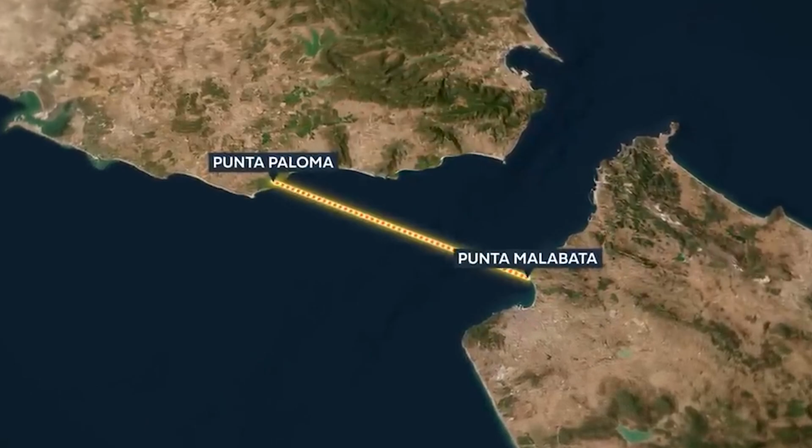Imagine a bridge so daring it could connect two continents, a structure stretching over turbulent seas, deep waters, and even the unpredictable forces of nature. Yet, despite its apparent simplicity in distance, no such bridge exists between Europe and Africa. Today, we'll uncover the reasons behind this engineering enigma.

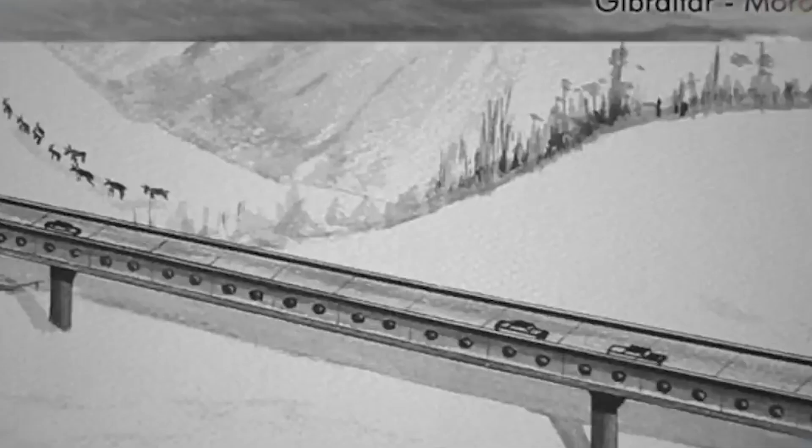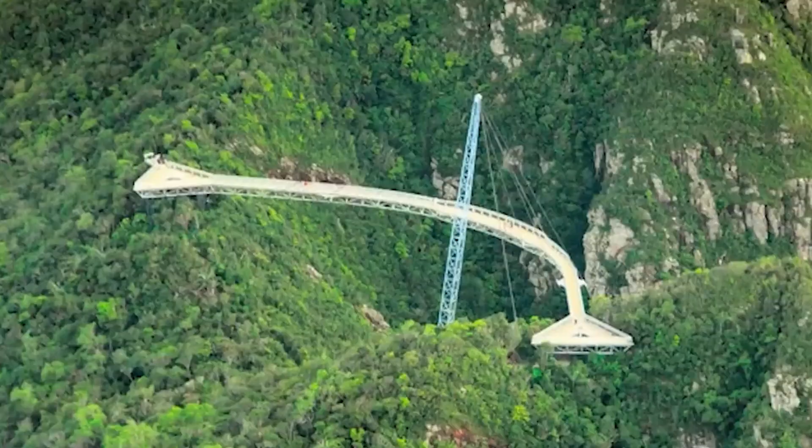The idea of linking Europe and Africa by bridge has fascinated engineers and dreamers for centuries. At first glance, it seems almost feasible. At its narrowest, the Strait of Gibraltar is only about 8.8 miles wide. You might wonder why, with so many long bridges already built around the world, including the Danyang-Kunshan Grand Bridge, which spans over 102 miles, a bridge across this stretch hasn't been constructed.

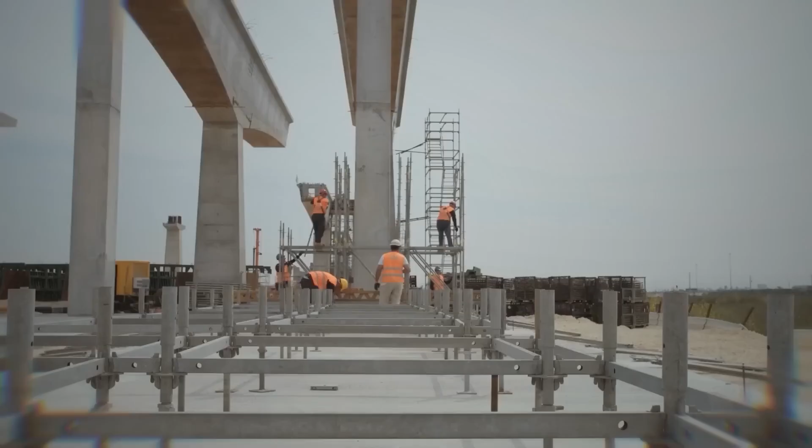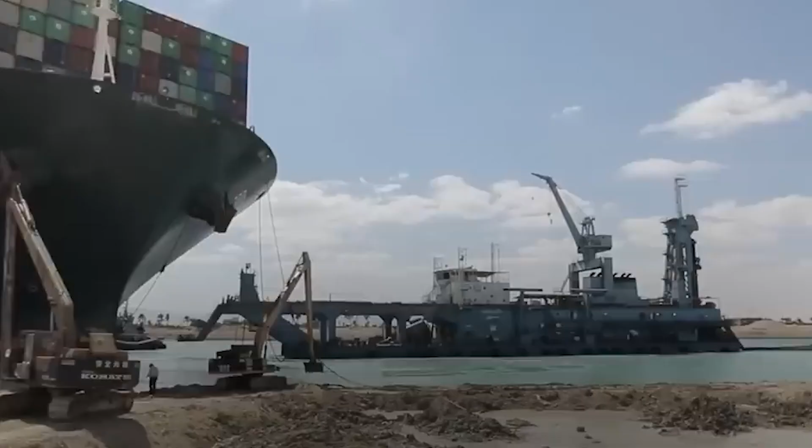The answer lies in a mix of technical, economic, natural, and political challenges that make such a project far more complex than it appears. Shipping lanes and maritime traffic. One of the foremost obstacles is the intense maritime traffic through the Strait of Gibraltar. This narrow passage is one of the busiest shipping lanes in the world, serving as the gateway between the Mediterranean Sea and the Atlantic Ocean.

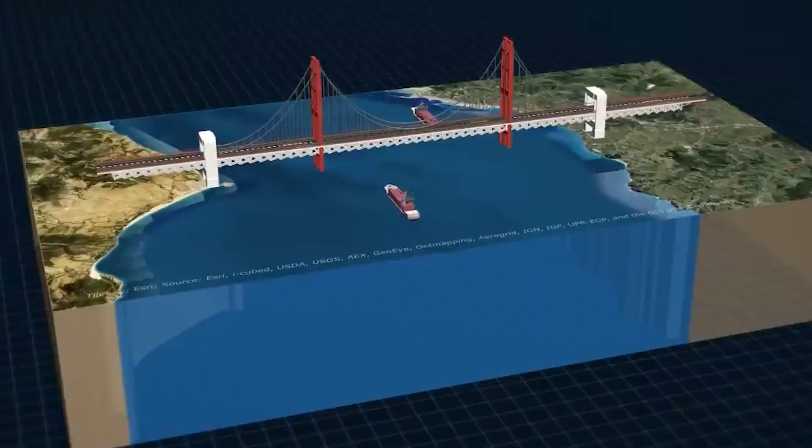Over 100,000 ships pass through this corridor every year, including massive container vessels and oil tankers. A fixed bridge, no matter how well engineered, would have to provide an enormous clearance, over 200 feet, to allow these giant ships to pass underneath without interruption.

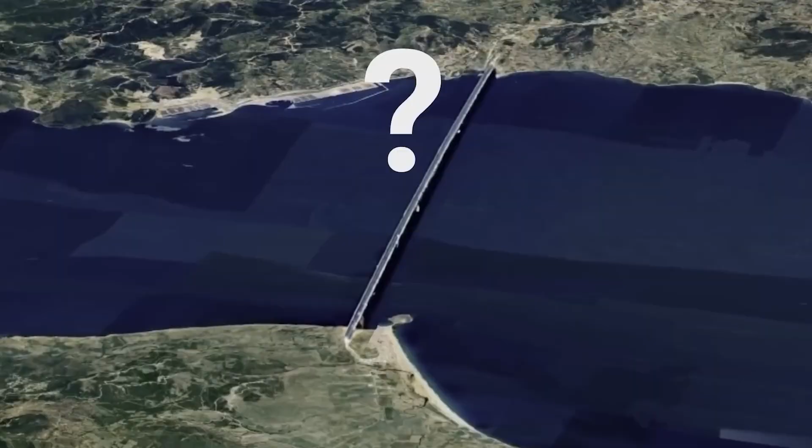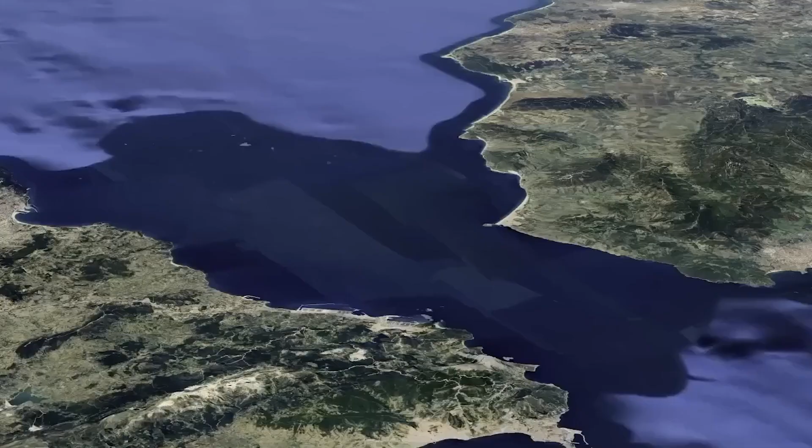Engineering and construction challenges. Building a bridge across the Strait of Gibraltar would be an engineering marvel, but also an extraordinary challenge. Firstly, while the distance might seem manageable at 8.8 miles, the depth of the strait is far more daunting. The average depth is around 1,200 feet, with some parts plunging down to 3,000 feet. In comparison, even the deepest bridge foundations in the world, like those of the Pelješac Bridge in Croatia, only reach depths of around 417 feet.

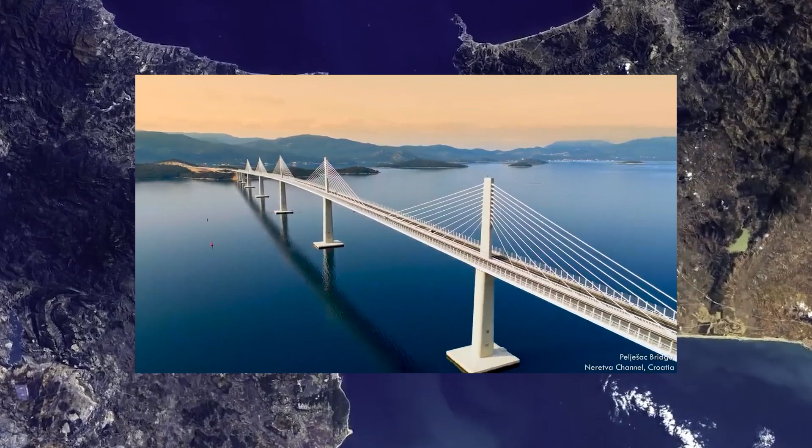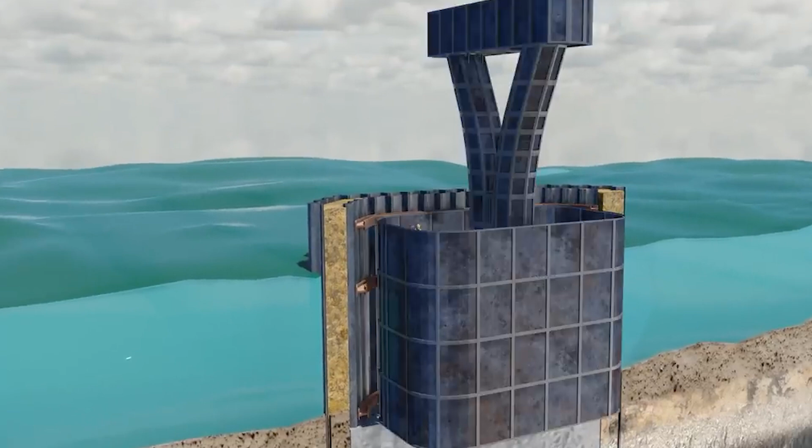To construct a bridge here, engineers would have to build foundations that extend into the abyss, likely requiring supports that are 7 times deeper than any existing structure. This not only presents technical hurdles, but also dramatically increases construction time and cost.

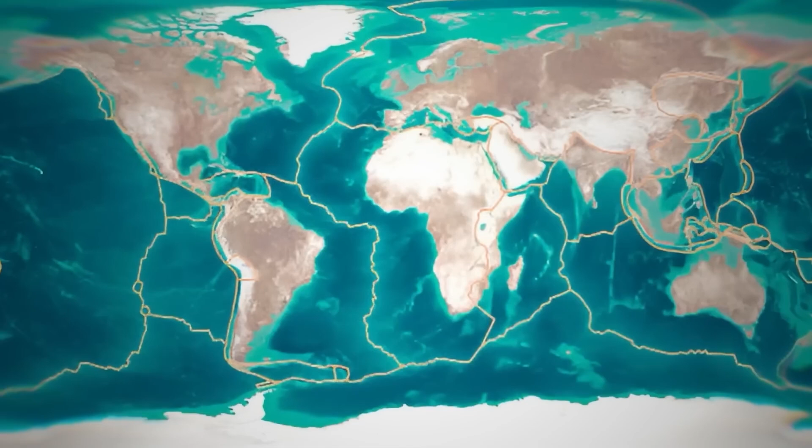Furthermore, ensuring that the bridge remains structurally sound over such depths and distances means dealing with immense water pressure, potential corrosion from salt water, and the constant pounding of waves and tides. Every component of the bridge would need to be designed to withstand these extreme conditions without compromising safety or functionality.

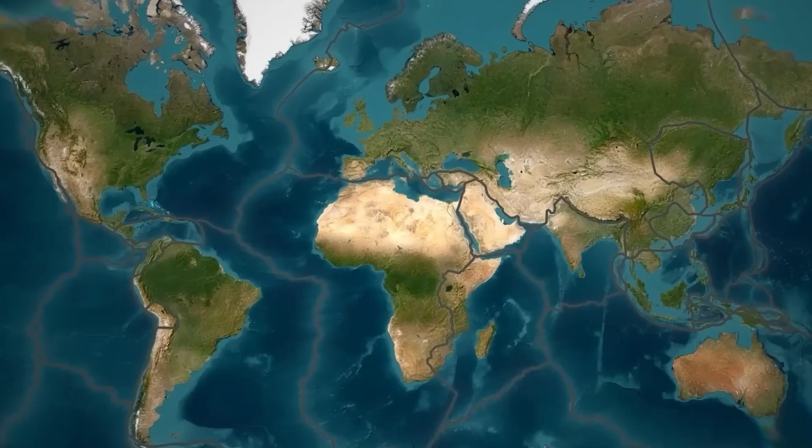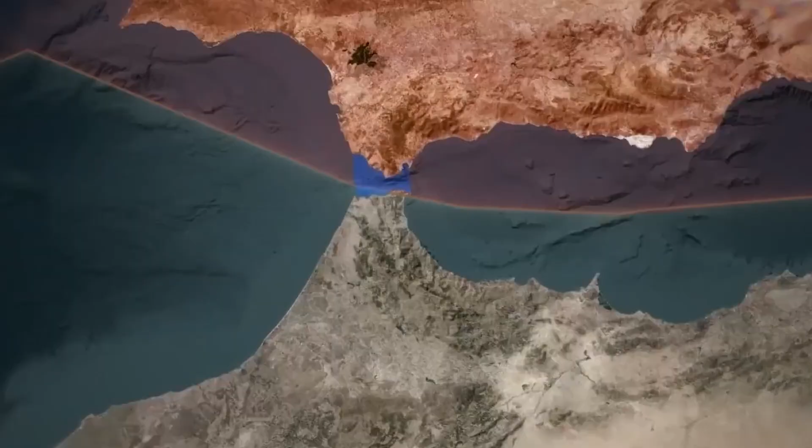Seismic activity and geological instability. Adding to the complexity, the Strait of Gibraltar sits directly above a tectonically active region known as the Azores-Gibraltar Transform Fault. Here, the African and Eurasian tectonic plates, along with the Iberian microplate, slowly grind past each other. This movement builds up stress that occasionally releases in the form of powerful earthquakes.

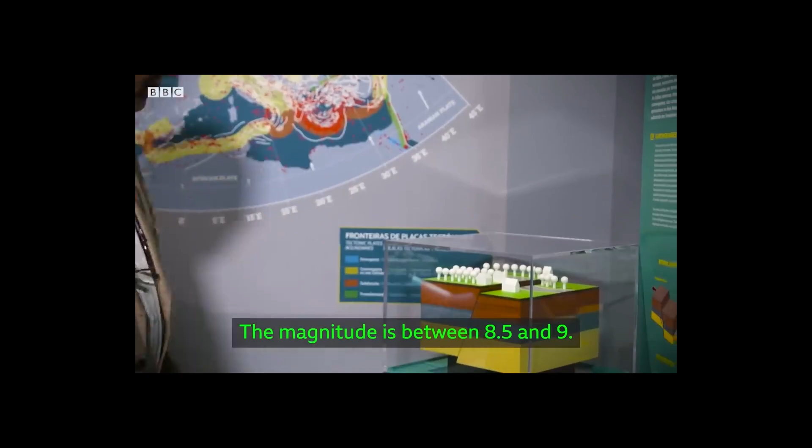History offers grim reminders. The 1755 Lisbon earthquake, one of the most catastrophic in recorded history, measured around 9.0 on the Richter scale and triggered a tsunami with waves as high as 65 feet. A bridge built over such a volatile region would require state-of-the-art earthquake-resistant designs.

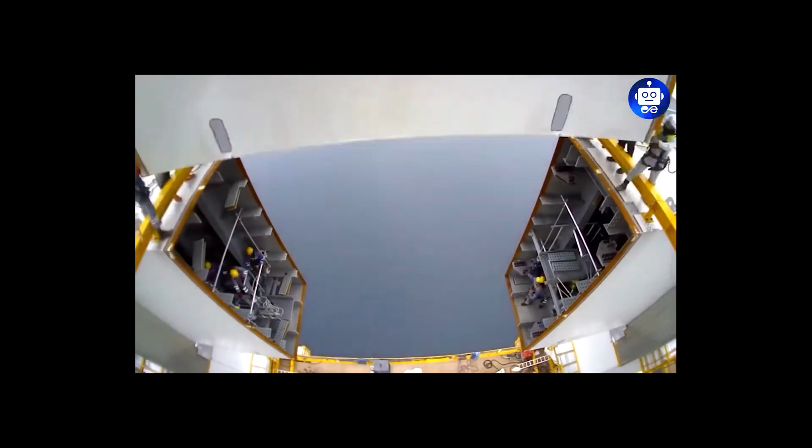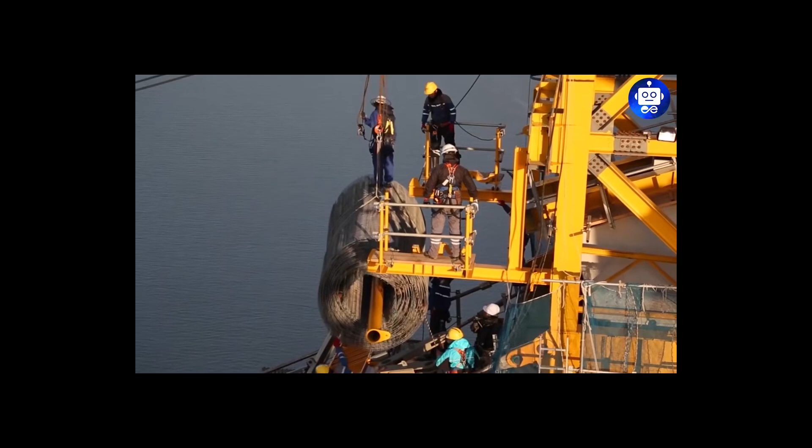While modern engineering has produced structures like the Akashi Kaikyo Bridge in Japan, which are built to flex and sway safely during seismic events, replicating such technology on an 8.8-mile scale, coupled with the need for deep foundations, would be extraordinarily difficult and expensive. The risk of catastrophic failure in an earthquake, not to mention the challenge of repairing damage afterward, further discourages such an ambitious project.

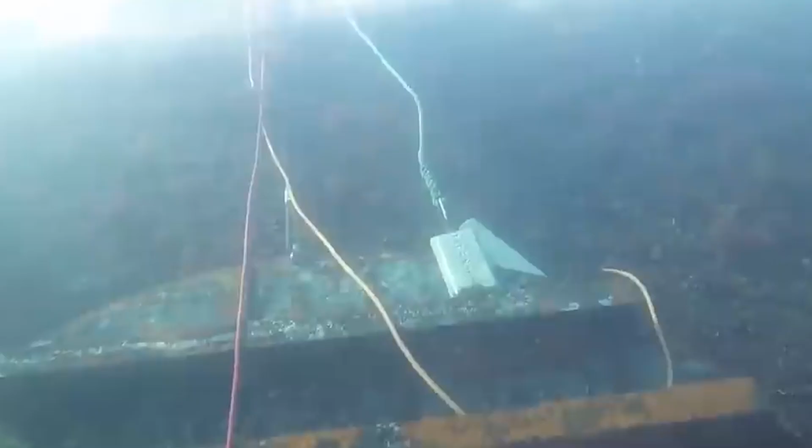Complex underwater conditions. Beneath the surface, the seafloor of the strait presents additional hurdles. The seabed is not a uniform layer of rock. Instead, it contains deep channels filled with unconsolidated clay deposits. These quaternary clay channels are unstable and can shift easily under pressure.

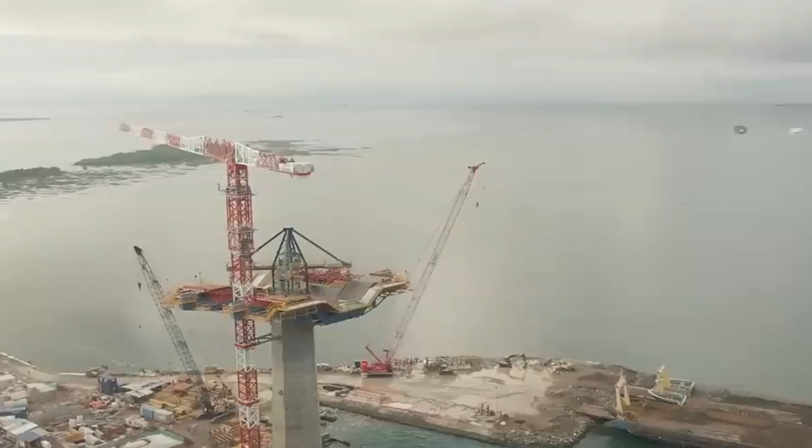If the foundations of a bridge were to be anchored in such an unpredictable environment, there would be a significant risk of subsidence or shifting over time, potentially leading to structural failure. In essence, engineers would have to devise entirely new methods for securing massive structures in an environment where the ground itself is unreliable.

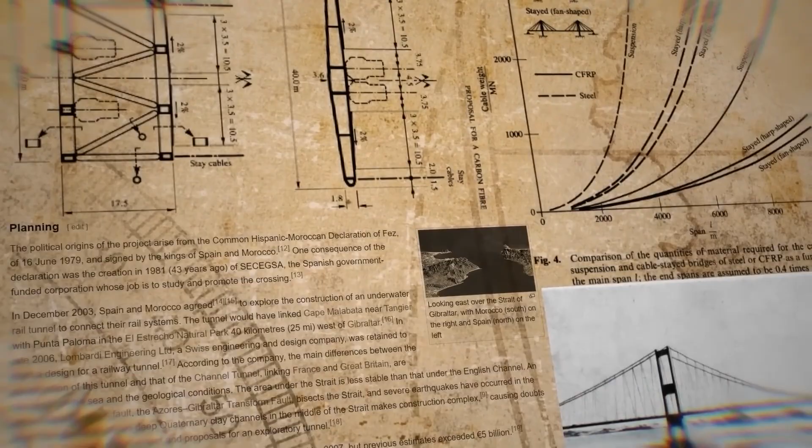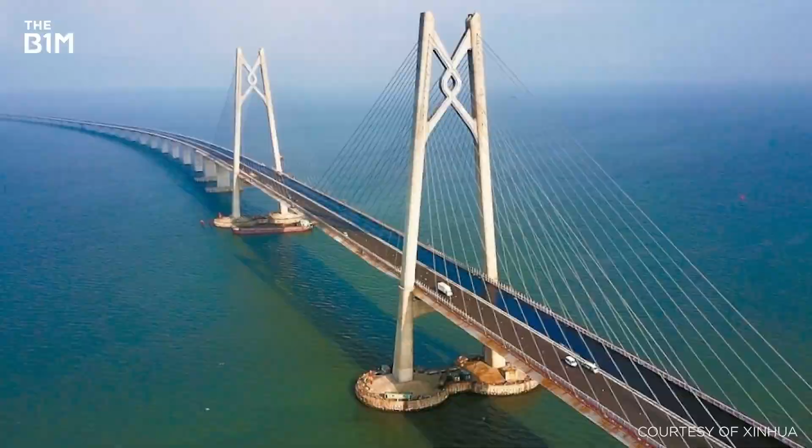Economic considerations. Even if technical challenges could be overcome, the economic cost of building a bridge of this magnitude would be astronomical. Consider the Hong Kong-Zhuhai-Macau Bridge, which cost around $18 billion to complete. A project spanning the Strait of Gibraltar would likely require a similar or even higher investment, given the additional complexities such as deep water construction and earthquake-proofing measures.

With billions of dollars on the line, stakeholders would need absolute certainty that the bridge would not only be safe and functional, but also economically viable in terms of maintenance and operation.

Trade and tourism between Europe and Africa are already thriving, but the existing modes of transport, ferries, airplanes, and even tunnels, are deemed sufficient by many experts. The marginal benefits of a direct bridge might not justify the enormous upfront and ongoing costs. Until there is a significant economic incentive that outweighs the risks, the project remains a tough sell.

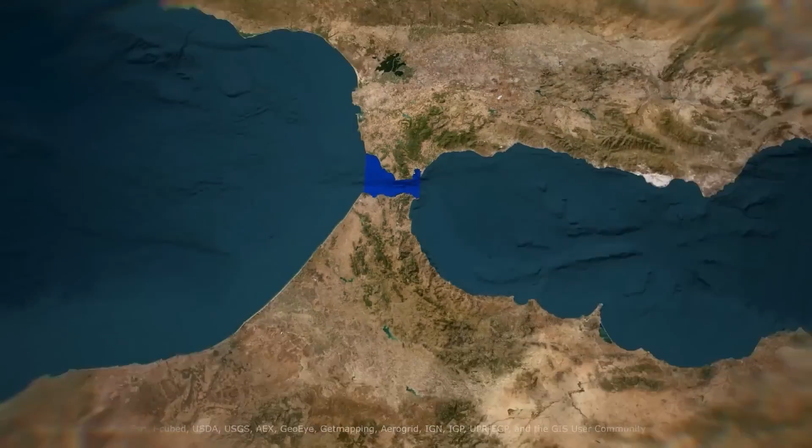Political and territorial disputes. Beyond the physical and financial challenges, political factors also play a critical role. The potential bridge would span from Spain to Morocco, two nations that have a complex historical and political relationship. These disputes have deep historical roots and continue to cause friction between Spain and Morocco.

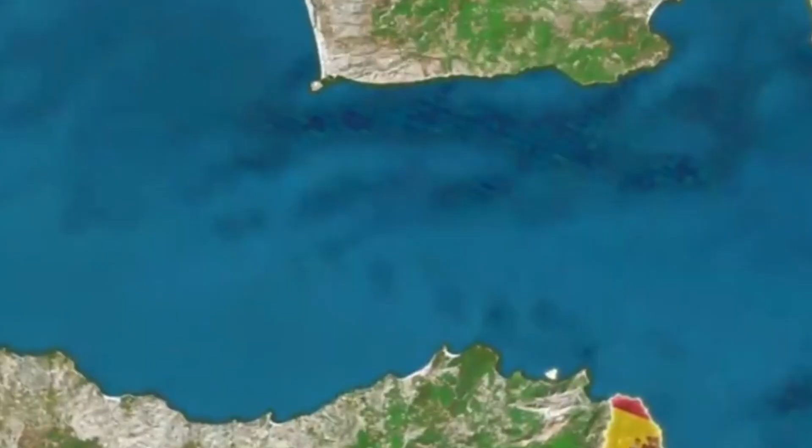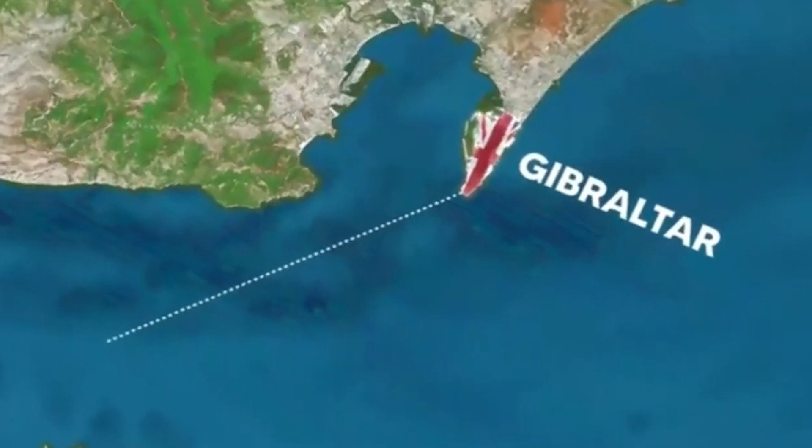Cooperation on a bridge project would require both nations to set aside long-standing grievances, which, given current political climates, is easier said than done. Moreover, the presence of the British overseas territory of Gibraltar further complicates the situation. Gibraltar's status has been a contentious issue between the United Kingdom and Spain for centuries. Any large-scale infrastructure project in the area would require multilateral agreements involving not only Spain and Morocco, but also Britain. Aligning the interests and policies of all these parties presents yet another layer of complexity.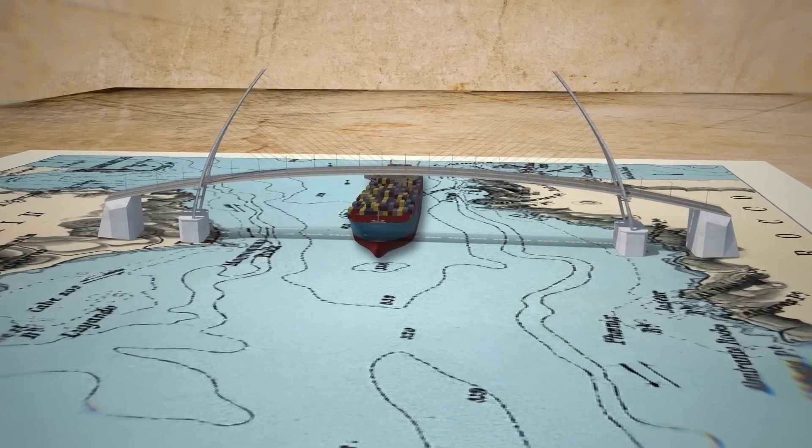Alternative proposals and their limitations. Over the years, several visionary proposals have emerged to solve the Europe-Africa crossing dilemma. One idea involved a drawbridge that could lift its roadway every few minutes to allow passing ships. While creative, this solution would cause frequent disruptions for road traffic, leading to massive congestion and long delays for vehicles. Imagine a bridge that is almost always in motion, opening and closing continuously throughout the day.

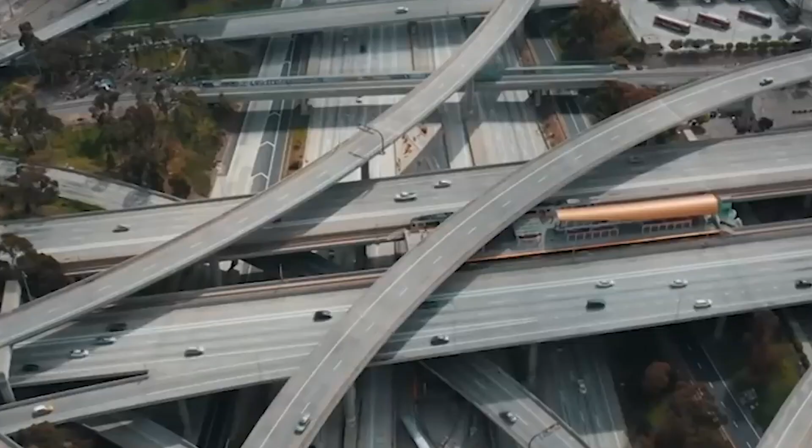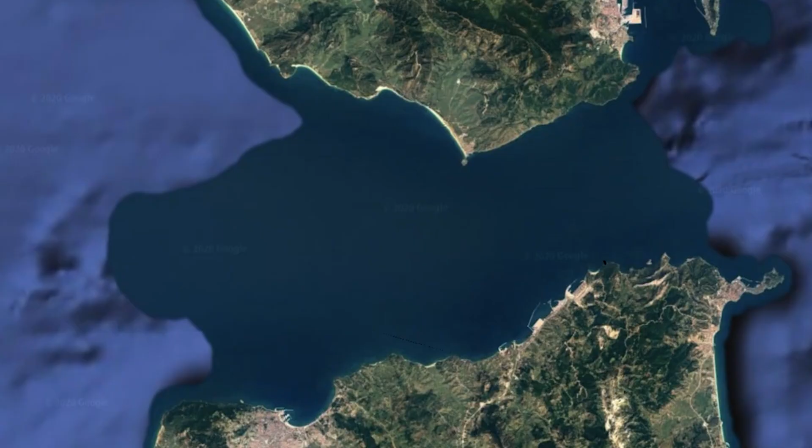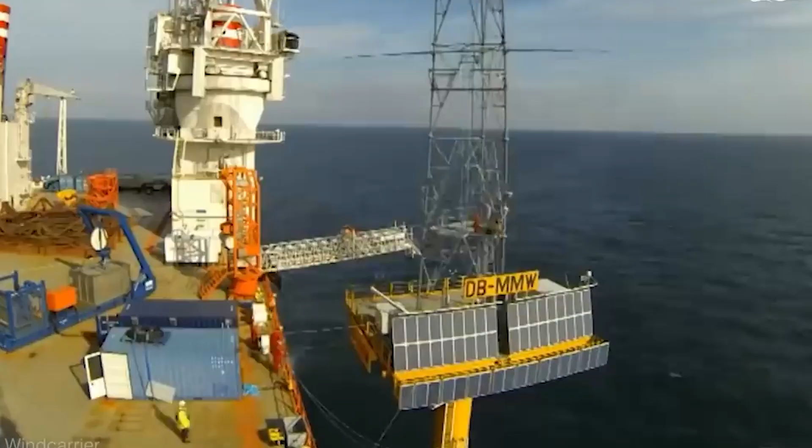Another innovative proposal came from American architect Eugene Tsui in 2004. His design featured a 9-mile crossing that combined a bridge with an underwater tunnel, along with a 3-mile-wide floating island equipped with wind and underwater turbines. Tsui's idea was both futuristic and multifaceted, promising not only a transit route, but also a renewable energy source and tourist destination. The role of natural obstacles.

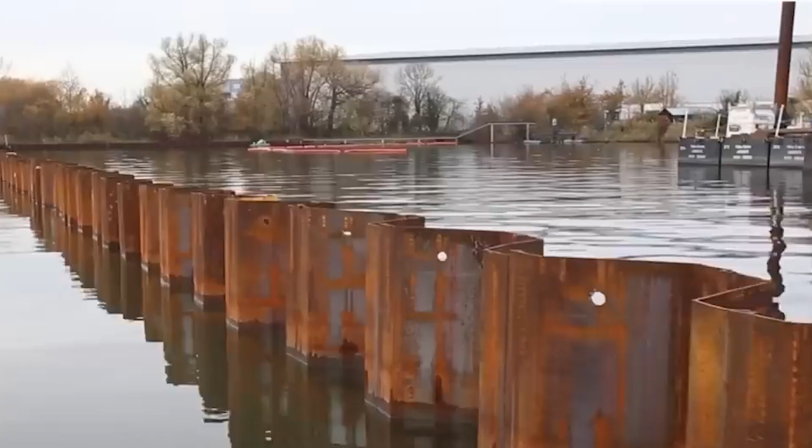Beyond human-made challenges, nature itself throws in unpredictable variables. The waters of the Strait of Gibraltar are home to a variety of marine life, including orca whales. While these creatures are generally not a threat to humans, there have been documented incidents of orcas ramming into boats, causing significant damage. Between 2020 and recent years, nearly 700 such incidents have been recorded.

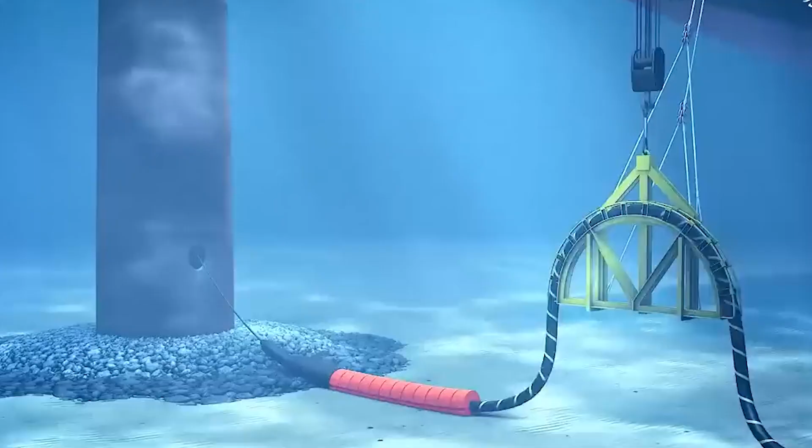These unpredictable interactions with marine life add another layer of risk for any construction projects or maintenance crews working in the area. The threat posed by these powerful animals, combined with the already hazardous sea conditions, makes the work environment even more challenging. Some historical accounts even hint at legends of sea monsters or colossal creatures lurking beneath the waves.

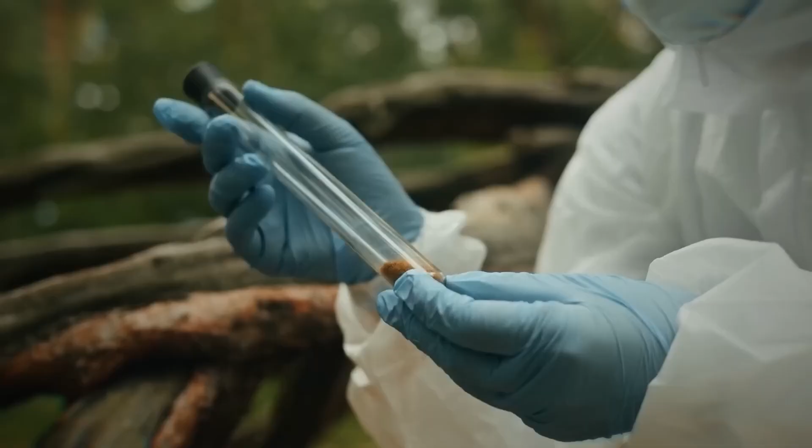While these tales are more myth than fact, they serve as a reminder of the untamed and unpredictable nature of the strait. Whether it's the potential for aggressive marine mammals or the chance of encountering unexpected natural phenomena, nature itself seems to conspire against any effort to create a permanent, fixed crossing between these two continents.

A future possibility. Despite the myriad challenges, ranging from deep and turbulent waters to seismic instability, engineering difficulties, astronomical costs, and political disputes, the idea of a Europe-Africa crossing continues to capture the imagination. Recent developments, such as talks about constructing an undersea tunnel in connection with the 2030 Soccer World Cup hosted by Portugal, Spain, and Morocco, hint that future collaboration might yet bring a breakthrough.

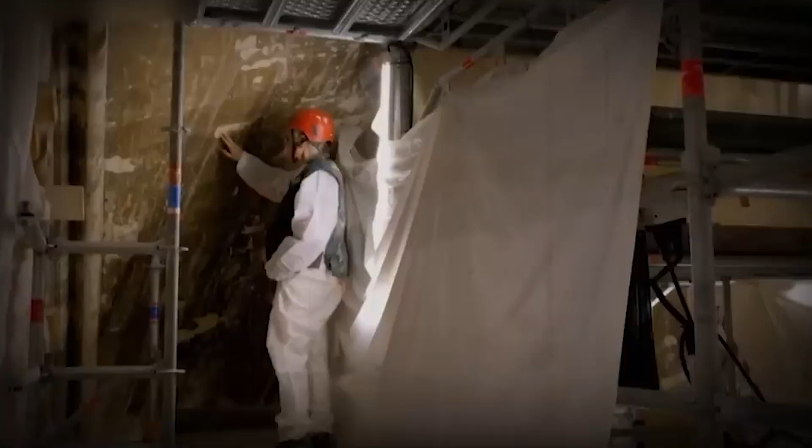In June 2023, Spain even allocated funds for a design study on a proposed tunnel aiming to provide a faster rail connection between Madrid and Casablanca. If successful, this could revolutionize travel between the continents and spur new economic opportunities.

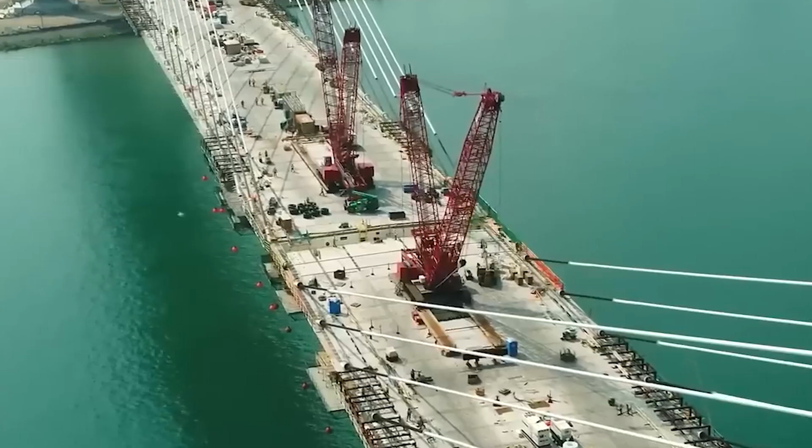As we look to the future, ongoing discussions and design studies give hope that someday, with advances in engineering and greater international cooperation, we might finally see a fixed link that unites these two continents. Until then, the Strait of Gibraltar remains a natural boundary, a place where the power of nature meets the limits of human ingenuity.